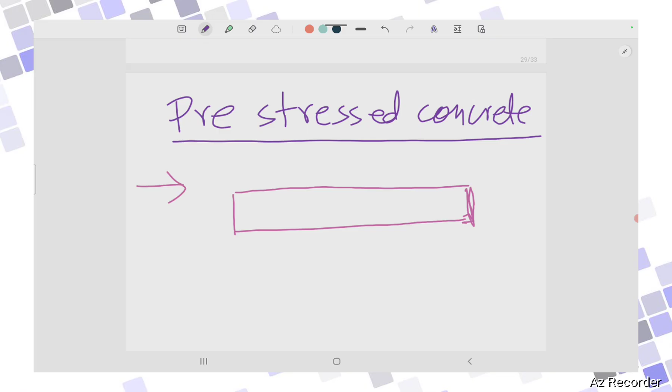So we have a concrete member. Let us consider a concrete beam, and here we have a steel reinforcement, suppose the tensile reinforcement. If you apply here the pull by means of a hydraulic jack, this side is mainly anchored, this side is anchored, and here you pull the hydraulic jack, and after some time if you release this loading...

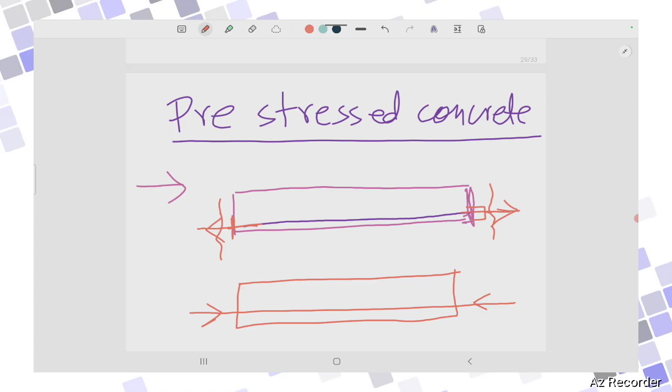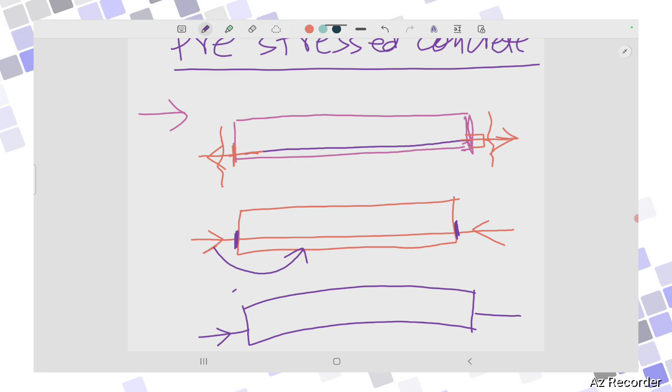In the steel, then the steel reinforcement tries to go into compression like this, and this compression is restrained either by providing the anchorage here. The anchorage prevents the movement of the steel back to the original position, so this steel tries to go back but can't, so the stress has to be transmitted somewhere, and this stress is eventually transmitted to this concrete, and this concrete undergoes compression. This steel transfers its stress back into the concrete, and this is called the pre-stress.

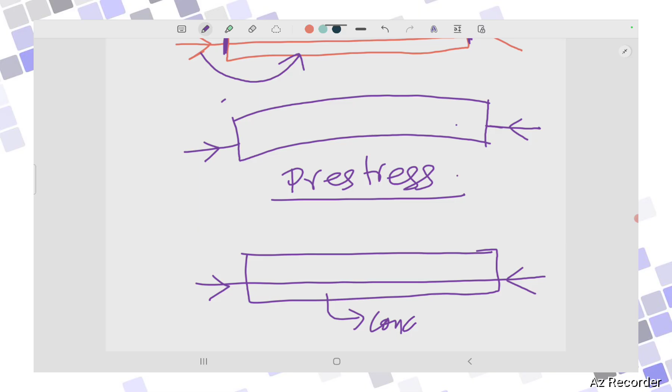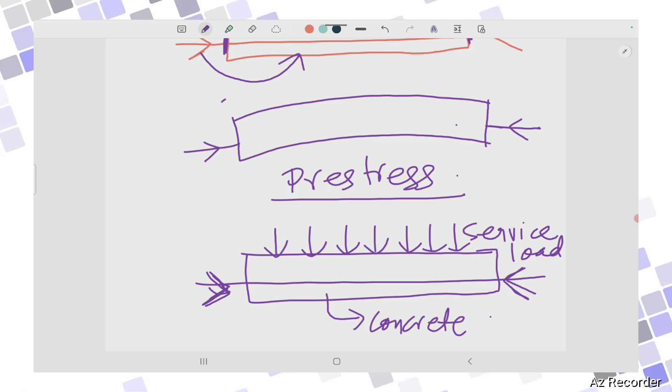So this is the concept of pre-stress. In pre-stressed concrete, you actually apply pre-compression, that is compressive force is already applied to this concrete member before any kind of service load is applied from the top. So this service load is applied only after the concrete has already gone through the pre-compression. So in this case, first you apply pre-compression.

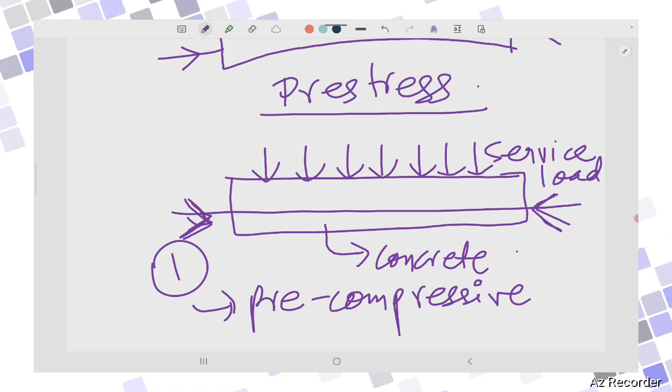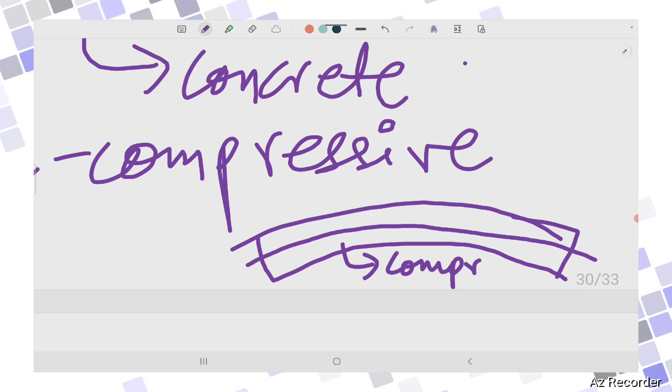Or it means that concrete is subjected to compressive stress first, so that it curls in this way. Although it might not be visible, the tendency is that the lower side goes into compression and this upper portion goes into tension, whereas in normal concrete the opposite happens. When the load is applied, the lower portion goes into tension and the upper portion goes into compression.

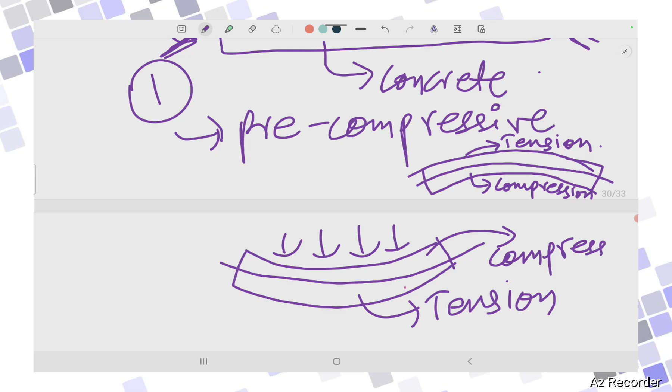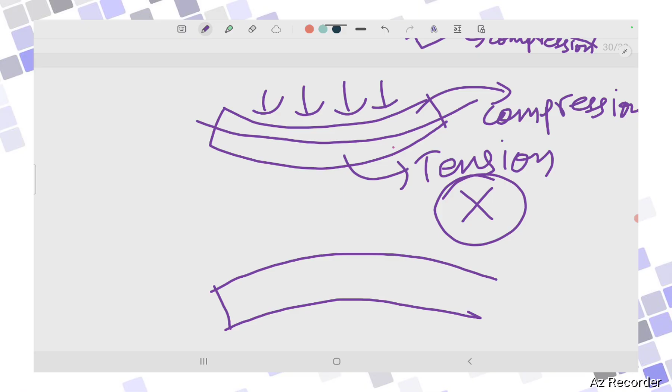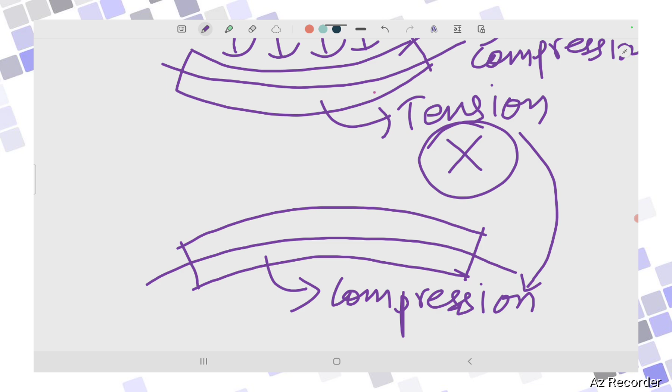So pre-stress actually causes this tension not to happen, so this tension is counter-reacted by this pre-compressed concrete. So this portion goes into compression, so this tension is balanced by the compression. So this is the main concept of pre-stressed concrete.

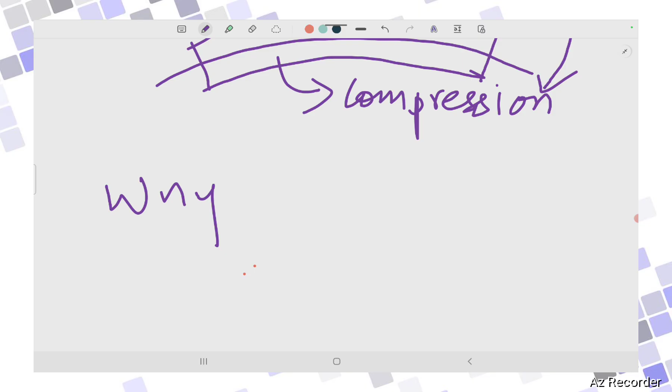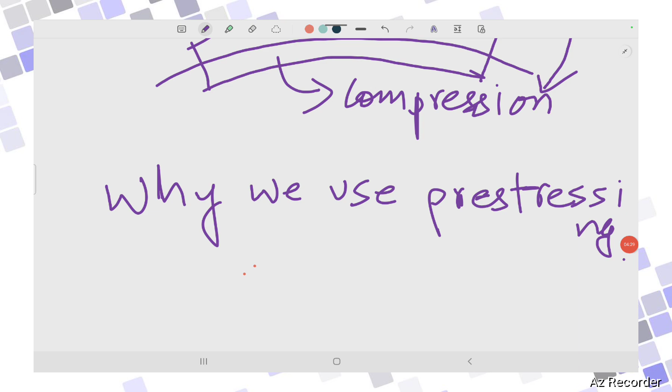And after pre-stressing, what happens? So why do we use pre-stressing? Why pre-stressing? Initially we know that concrete lacks high tensile strength.

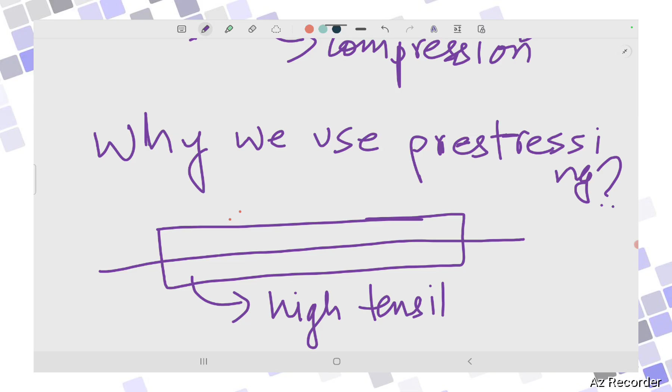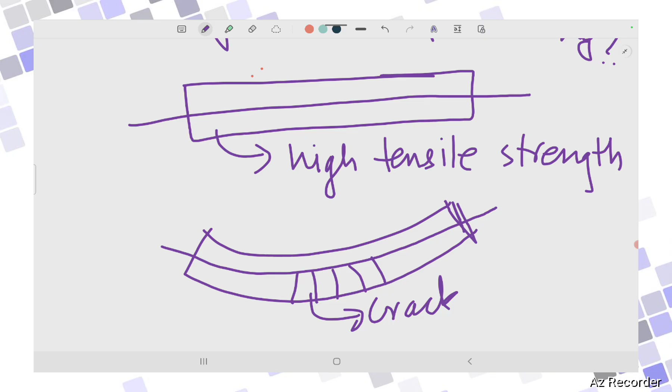Due to this reason, when the concrete is subjected to loading, due to flexural loads the concrete curves down, and due to this reason cracks are developed in the concrete. These cracks result in the corrosion of the steel, and this corrosion results in loss of durability in the concrete eventually.

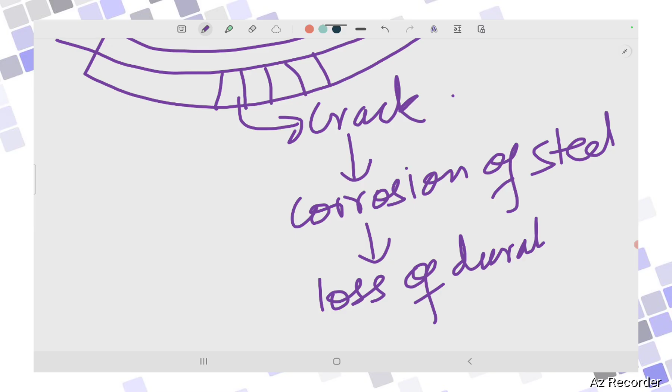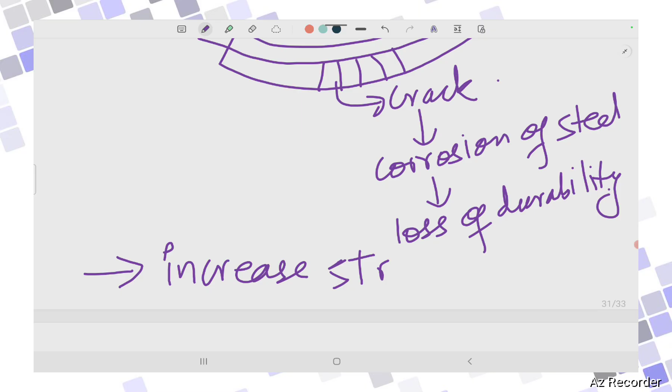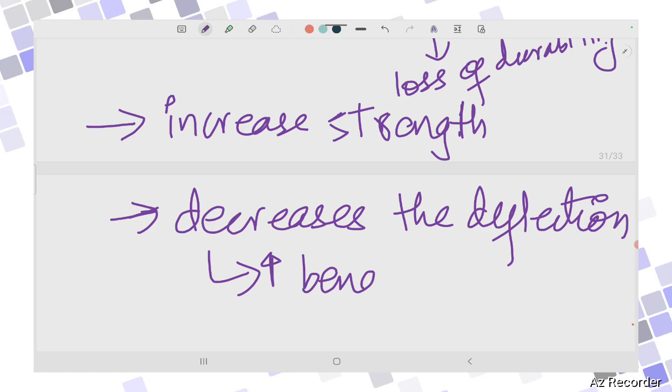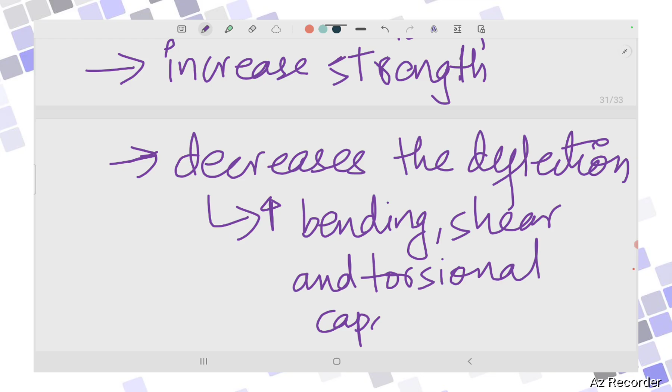So the main purpose of pre-stressing is to increase the strength. First of all, you need to increase the strength, and secondly, it also decreases the deflection. So when deflection is reduced, it also increases the bending, shear and torsional capabilities of that concrete element. Due to this reason we provide pre-stressing.

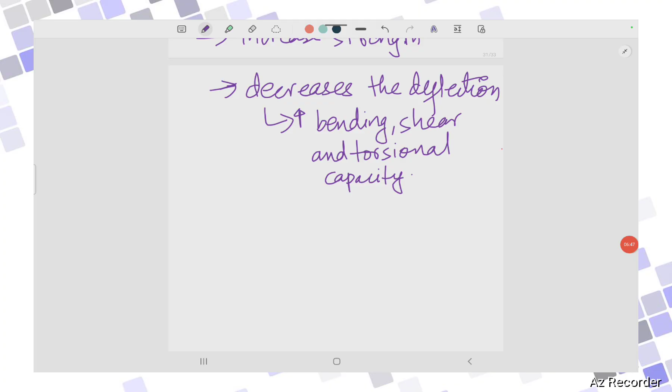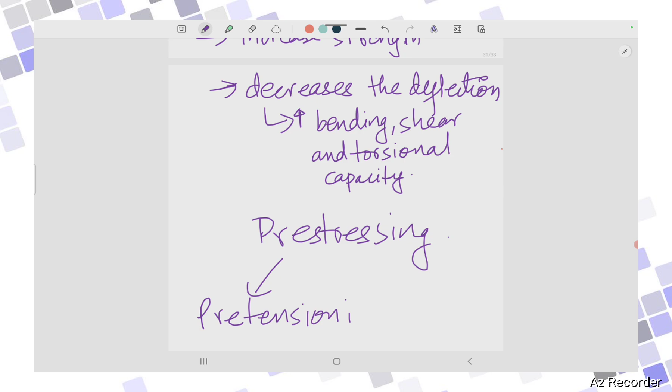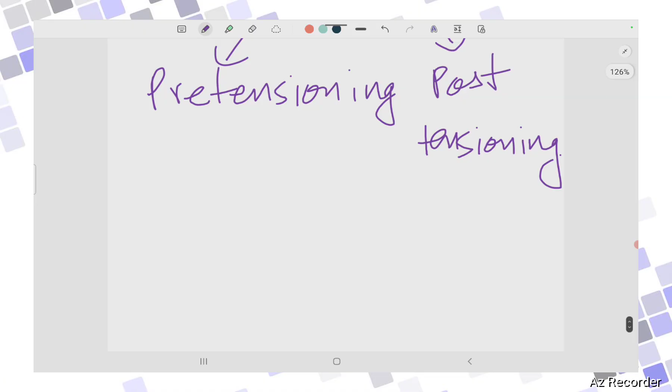And this pre-stressing is also carried out in two ways. One is pre-tensioning and the other is post-tensioning. So in pre-tensioning, let's change the color. So in pre-tensioning...

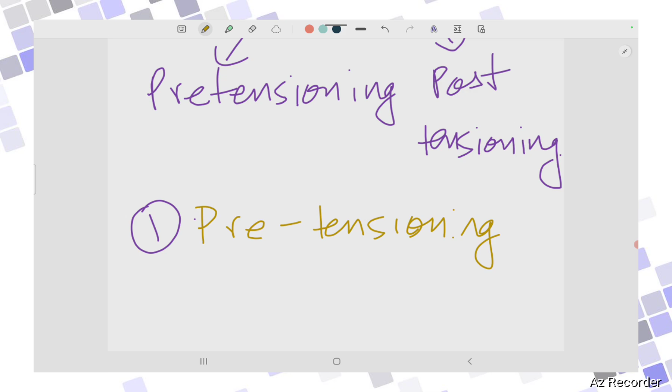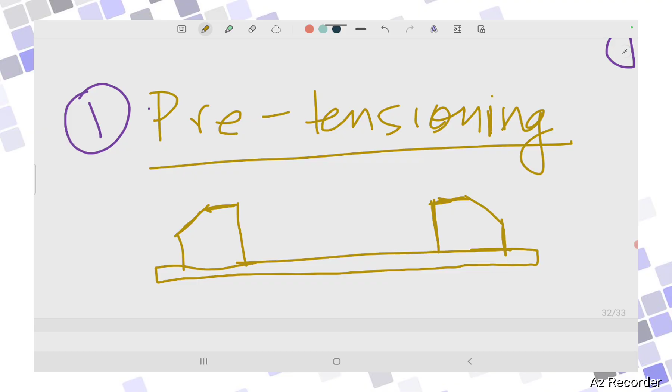What we do is there is a pre-stressing bed. This one is the bed, and you fix the two abutments which are used to hold the steel, in order to pull them or apply the tension. So this is the steel, and then you apply the tension force by means of the hydraulic jack.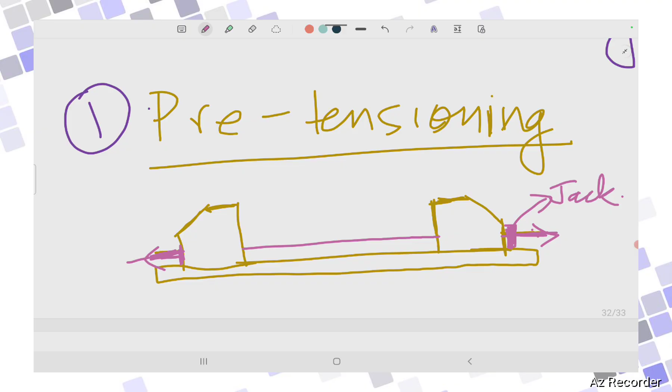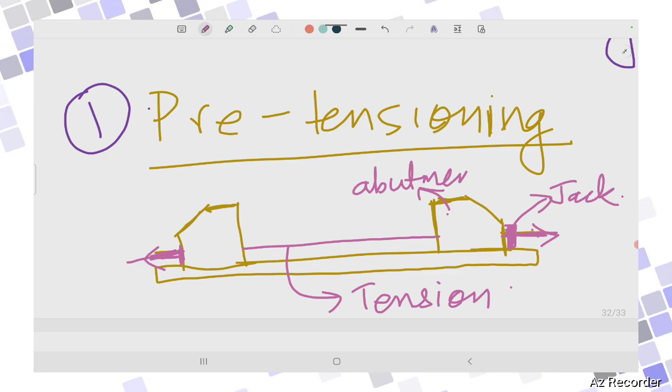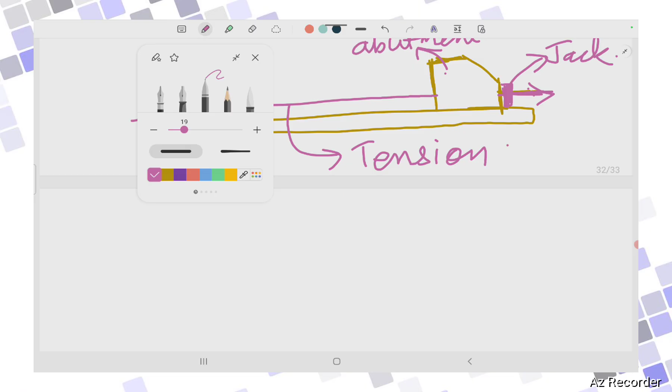This is the hydraulic jack, and one end is anchored, and the other end you apply the hydraulic jack. So the force is applied. When the tension force is applied, this steel is then subjected to tension. This is the abutment. So this steel is fixed between the twin abutments, and then the hydraulic jack applies the tension force, and after that, you then cast the concrete here.

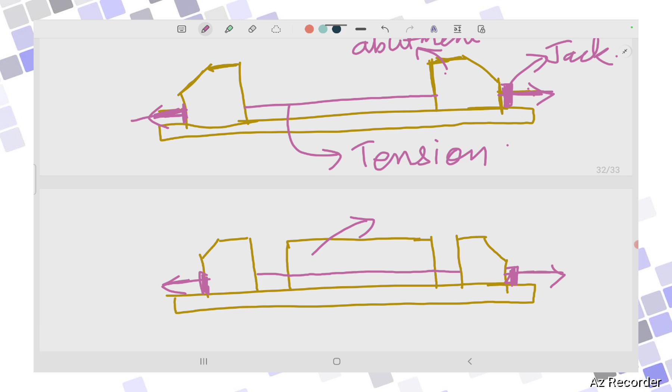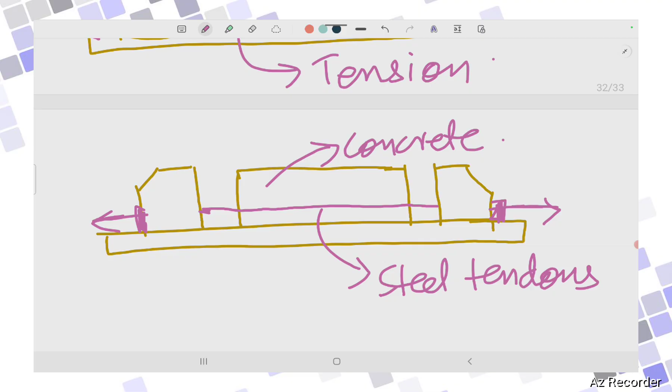Here the steel is in tension. Here the hydraulic jack is still applying the tension, so here still the tension force is there. Till now there is no stress transfer to our concrete. This one is concrete, and this continues until you cut the tendons. So these are the steel tendons. Until you cut down the tendons, the tension force is still applied, and there is no stress transfer to the concrete.

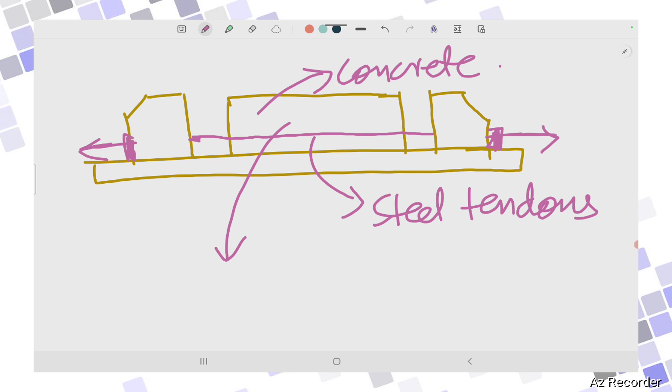And after this, the concrete hardens. So first you need this concrete to harden and gain the required strength.

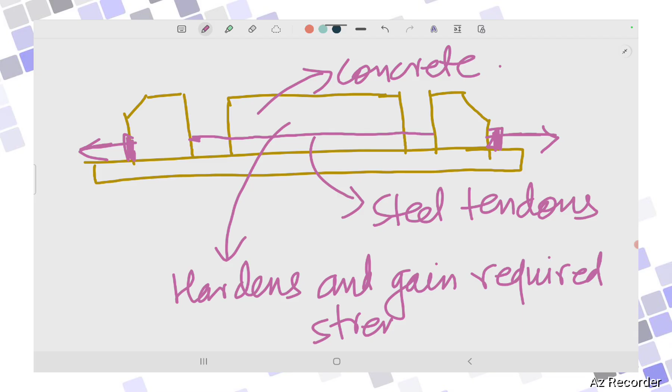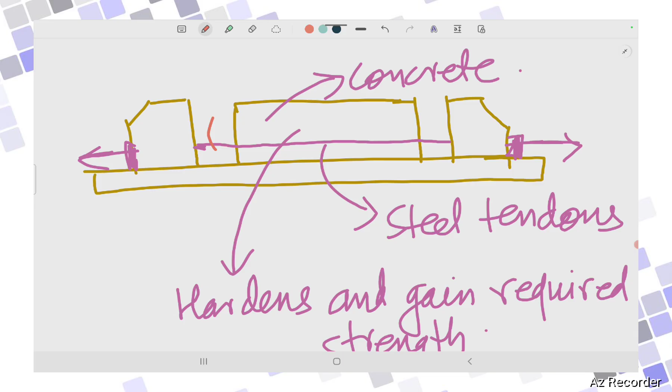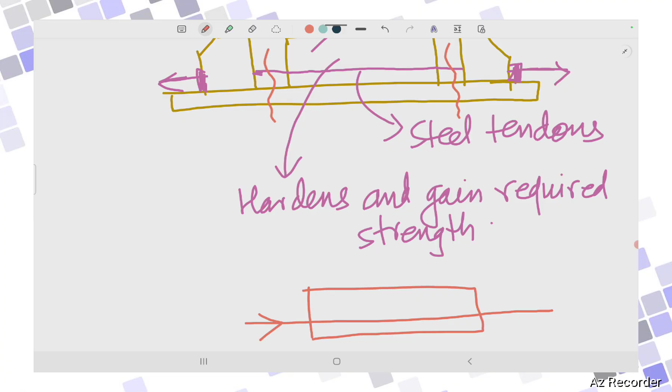After the concrete hardens and gains the required strength, you cut down or cut off the tendons from the tension force. So when you do this, this concrete has to now receive this compressive force from the steel tendons.

So how this happens is that the steel tries to occupy its original position. When you remove the tension force, it tries to come back into the original position. However, there is a restraint, since the concrete is already hardened, so it does not allow the steel to go back into the original position.

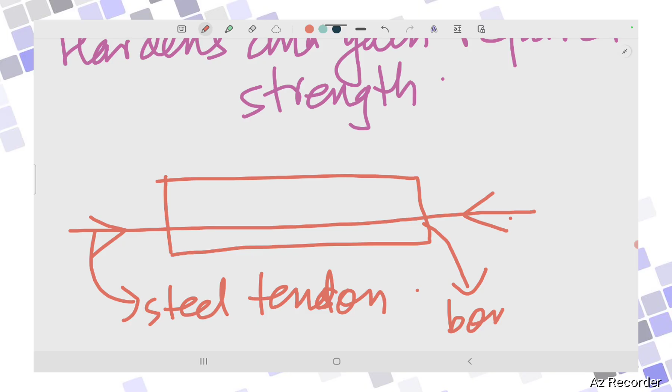So instead, this compressive tendency of the steel to go back is then transferred to the concrete by means of the bonding between the steel and the concrete. Due to this bonding, this compressive tendency of the steel to return to its original position is transmitted to the concrete.

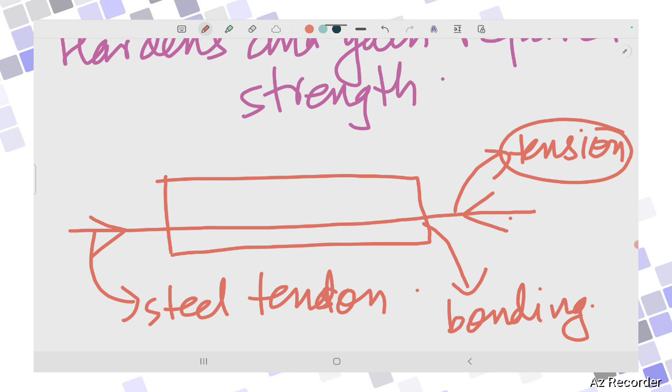So your steel is still maintained in tension because it can't come back into the original position, so it is still strained and not able to move. However, it wants to come back into its original position, so this tendency is transmitted to the concrete, and the concrete undergoes this phenomena.

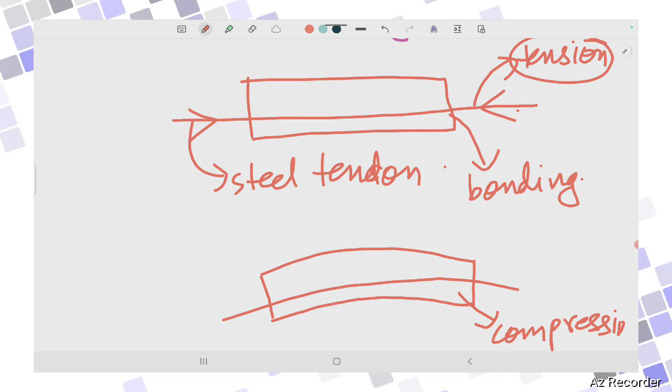So it is subjected to compression on the bottom side and tension on the top side. When this concrete is subjected to compression, it counter-reacts the original tendency of the concrete, which used to have tension in the bottom side and compression on top.

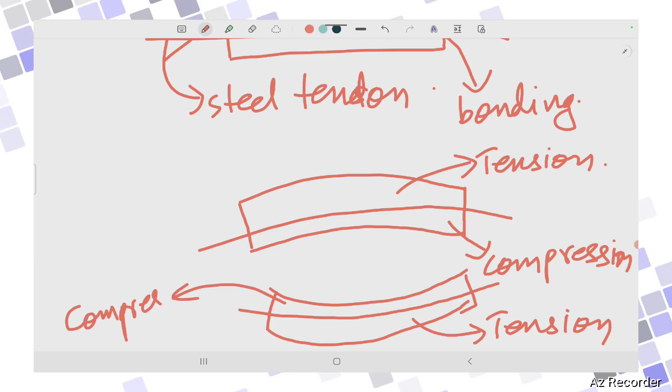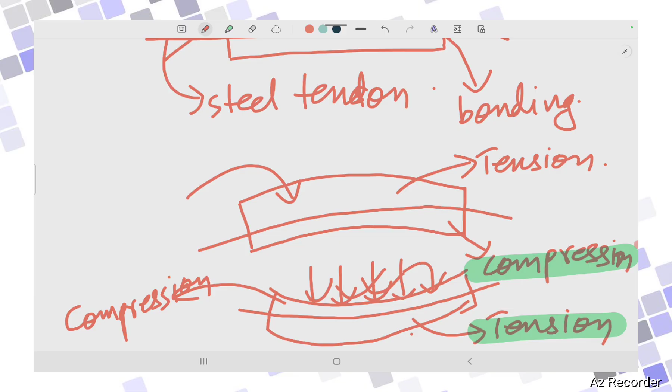For normal concrete with no pre-stress, that is the normal building scenario. But for pre-stressed concrete, it's the opposite scenario. So this compressive force counterbalances the tensile force during the service load scenario. This is the main concept in pre-tensioning.

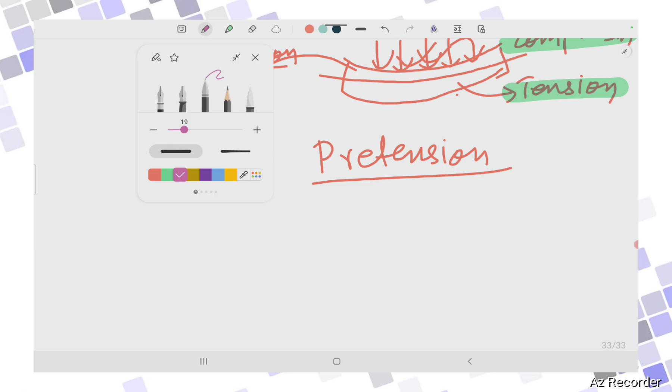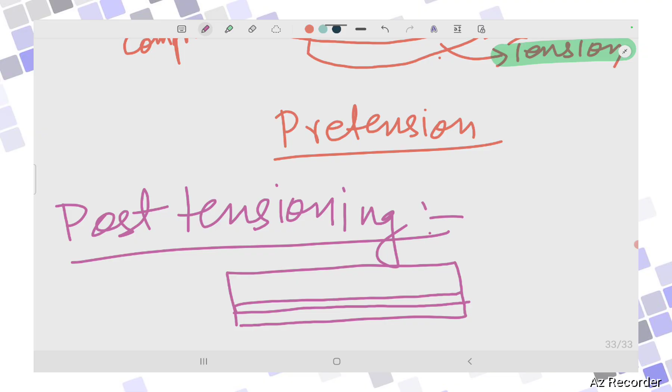Now let's talk about post-tensioning. In post-tensioning, what you do is you cast the concrete by leaving a hollow duct here. This is a hole. If you draw a cross section, there is a hole.

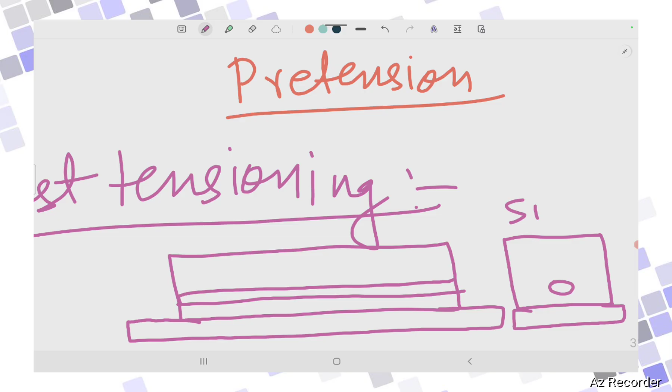Here also you have a pre-stressing bed where you cast concrete. So this is the bed, this one is the side view, and this one is the front view. So you actually cast the concrete by leaving a duct here.

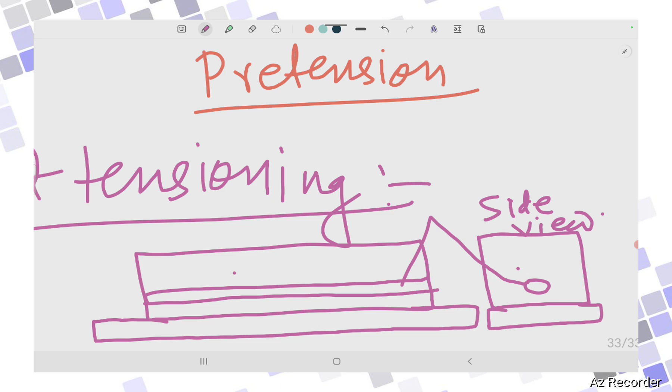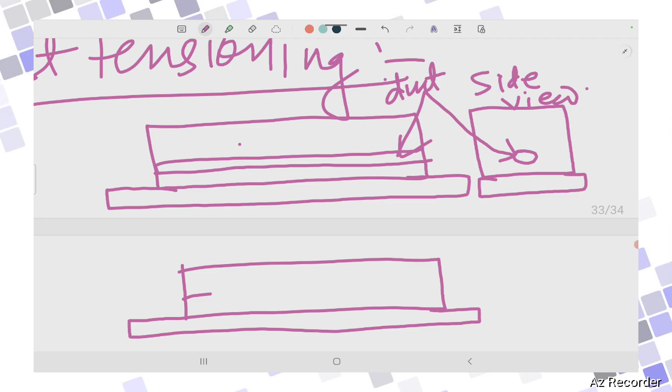This duct is used to put the reinforcement or tendons after the concrete hardens. So in this duct you actually put the tendons.

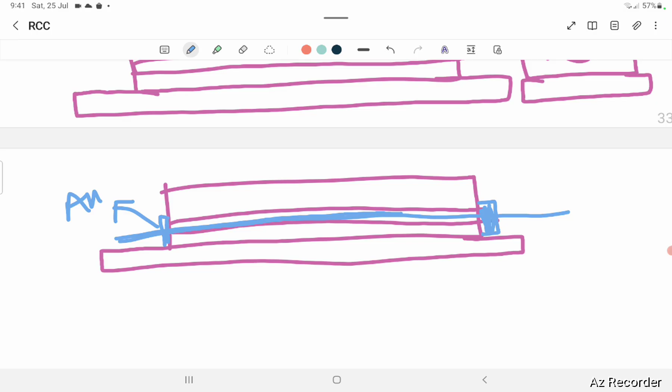You put a hydraulic jack on this side, and you anchor the other side. There is a hydraulic jack here. So this side you put the jack.

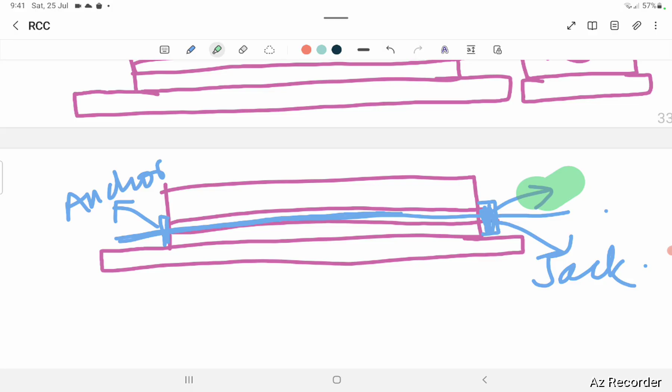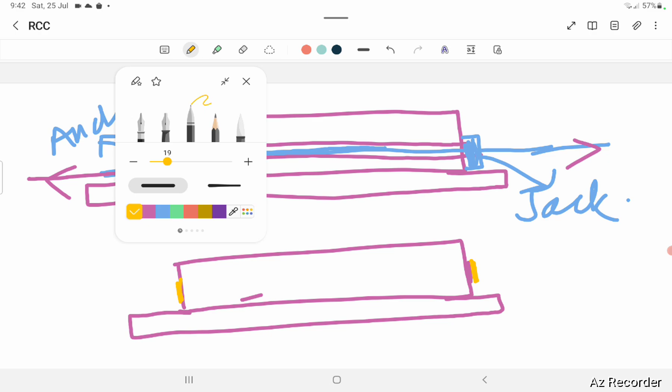After this, you apply the tensile force on this side also. After applying the tensile force of required strength, you then anchor both sides, so that the steel cannot move.

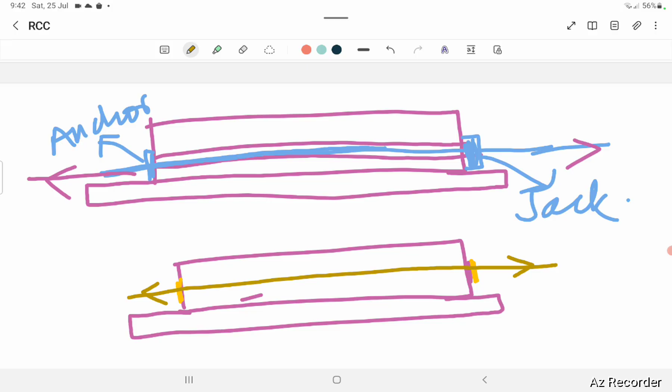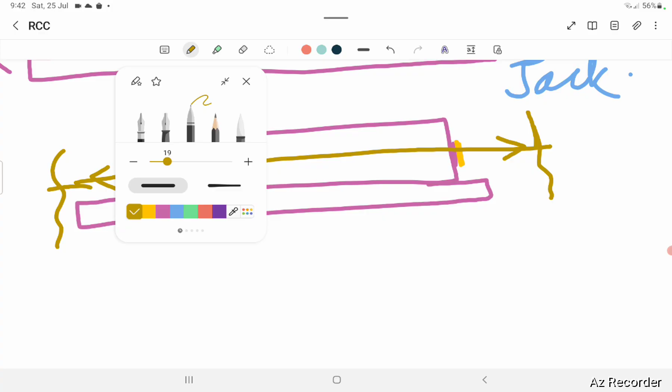So this steel cannot move once you anchor it. The steel is still in tension, and as it can't move, after the pulling force is removed, this tensile force tries to bring it back into its original position.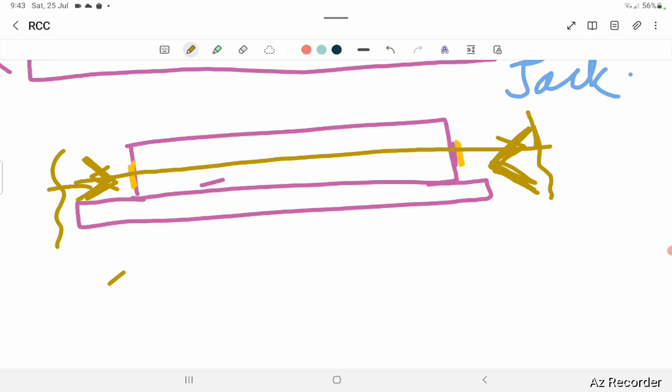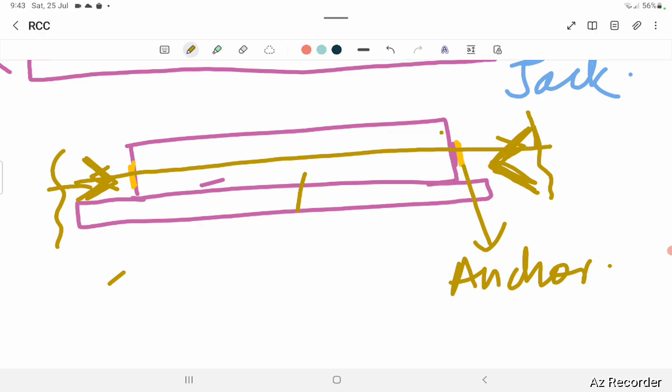After removing the tensile force from the hydraulic jack, the steel tries to come back into the original position. However, you have already anchored it here, so it can't move back. So this stress has to be transmitted to the concrete, and the concrete again undergoes compression.

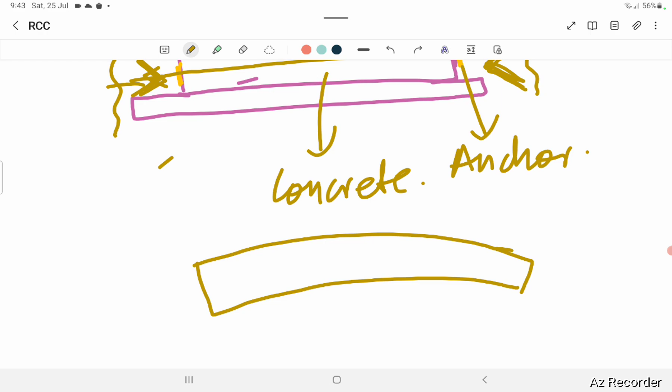So this part is again compressed because the steel tries to move back into its original position. However, it can't move because of the anchors provided here. This anchor prevents the steel from moving back to its original position, so eventually this stress from the steel is transmitted to the concrete by means of the anchors.

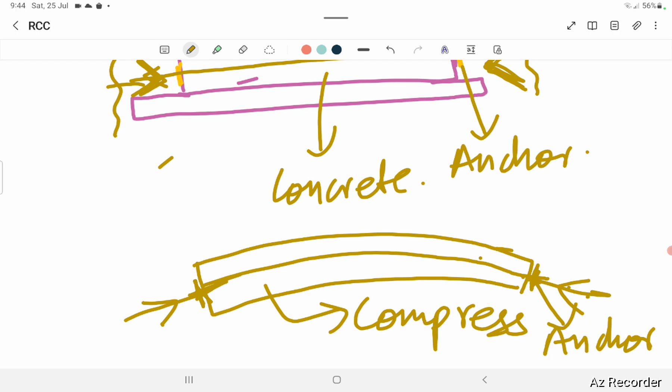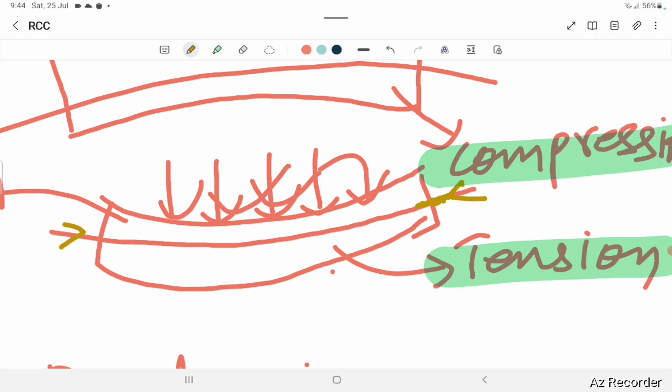So this is the concept: in post-tensioning, anchors transmit the force to the concrete, whereas in pre-tensioning, the hardened concrete prevents the movement of the steel back to its original position, and due to this, the bonding between the concrete and steel transmits the pre-stress force and compresses the concrete.